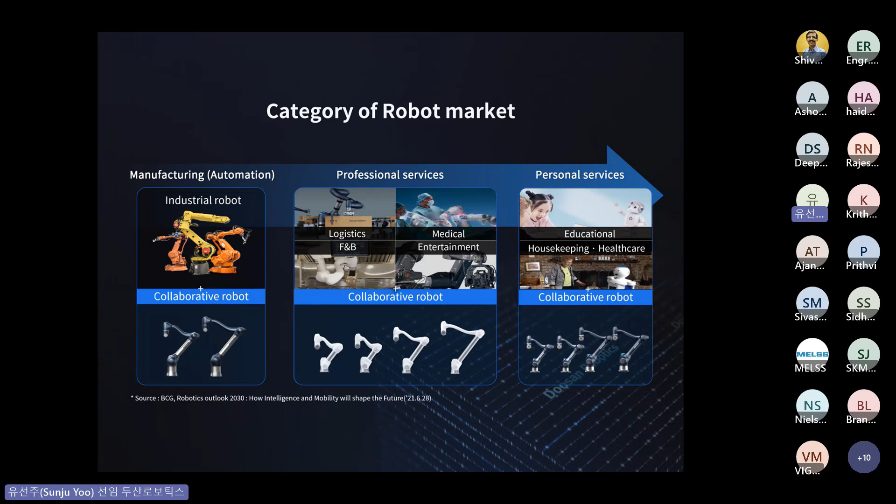Then, why should we use Cobots? First, industrial robots are large and heavy. Second, they are dangerous because of their high work speed, so we need to install a safety fence. On the other hand, collaborative robots are lightweight and can be combined with mobility like AGV or AMR. Second, it is safe, so we don't need to install a fence, and it is easy to program.

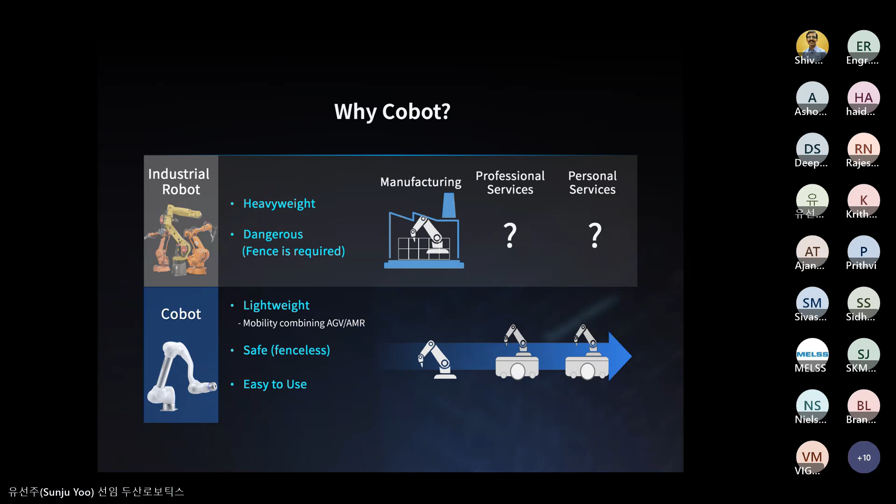Here are the three main features of Doosan Robot: technology, global presence, and new application leader. Different from industrial robots, a cobot has many sensors to collaborate with a human being. Therefore, Doosan robots specialize in being safe and easy, meaning that a non-professional can also operate easily by direct teaching and easy programming. Lastly, flexibility, since it's flexible with easy installation without layout changes.

Doosan Robot received the highest safety certificate, PL e, and safety category is level 4, which is at least one level higher than competitors.

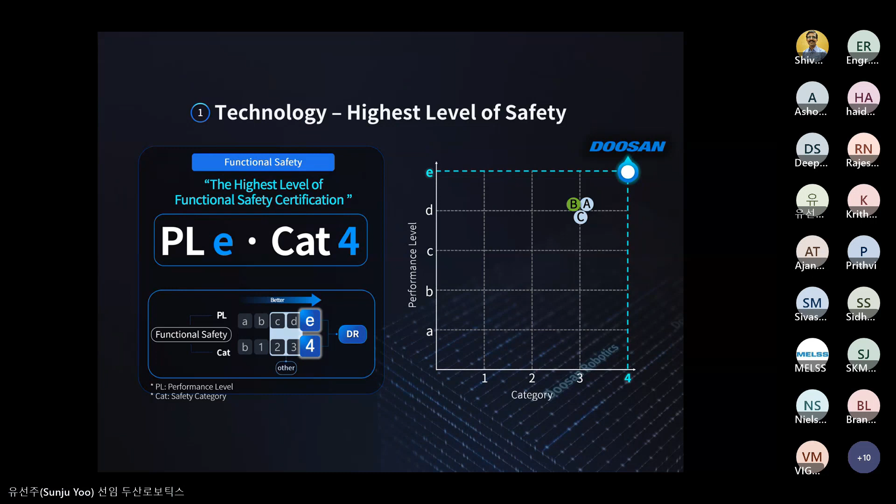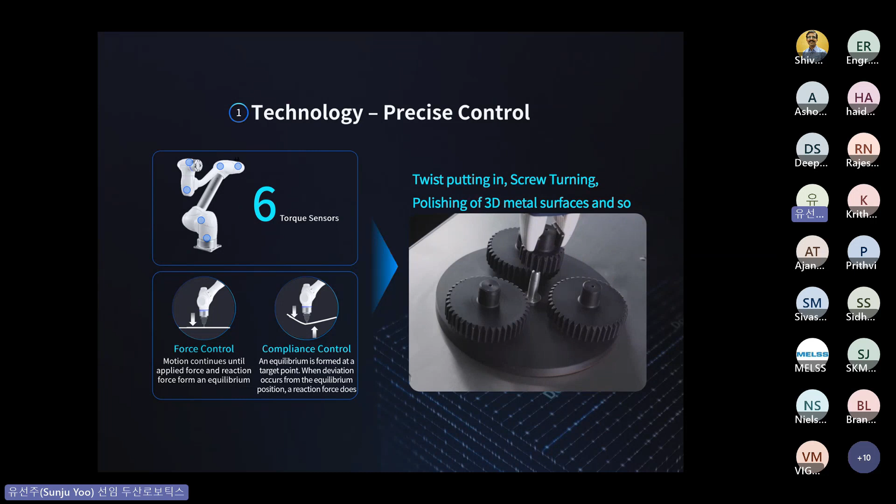Six joint torque sensors are mounted on the axis as a default. It is a really strong advantage over other competitors, which is connected to a high performance of force and compliance control. For example, this can be a big advantage in applications such as bolting, grinding, and polishing.

Since the free drive is also very smooth, the user can experience that during the teaching.

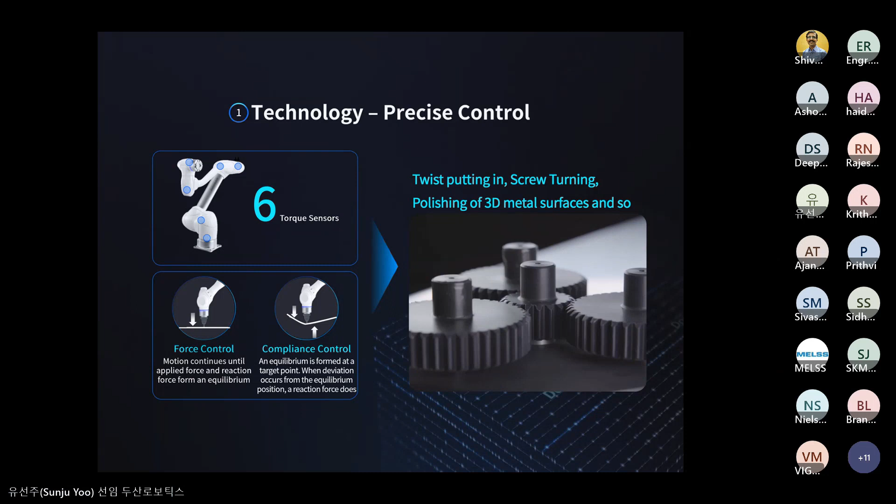And the specialty of each series: for the M series, not like the other Cobot brands, the joint torque sensor is mounted on all 6 axes, so we guarantee safe and precise force control. As an economical model, the A series can achieve short ROI and mount a force torque sensor at the 6th axis as an option. Furthermore, the H series, through the gravity compensation algorithm, is so powerful in the market, especially in the palletizing application, since it can handle the maximum 25 kg payload, which is the first and unique in the Cobot field.

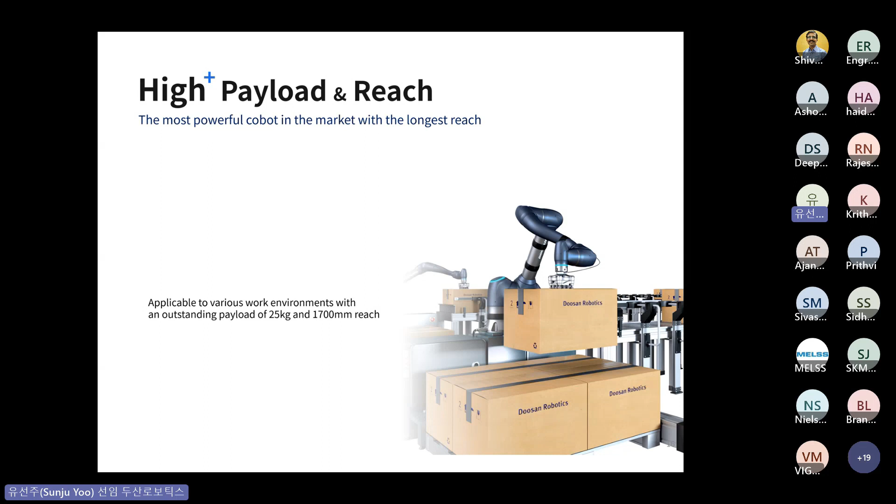Next, I will introduce our high payload robot H series and palletizing solution. H series is a high payload robot that can handle up to 25 kg with a maximum reach of 1.7 meters. It can be used in a variety of applications, including palletizing, heavy-duty handling, and machine tending. Six-joint torque sensors are mounted on all axes, and the robot itself weighs only 75 kg.

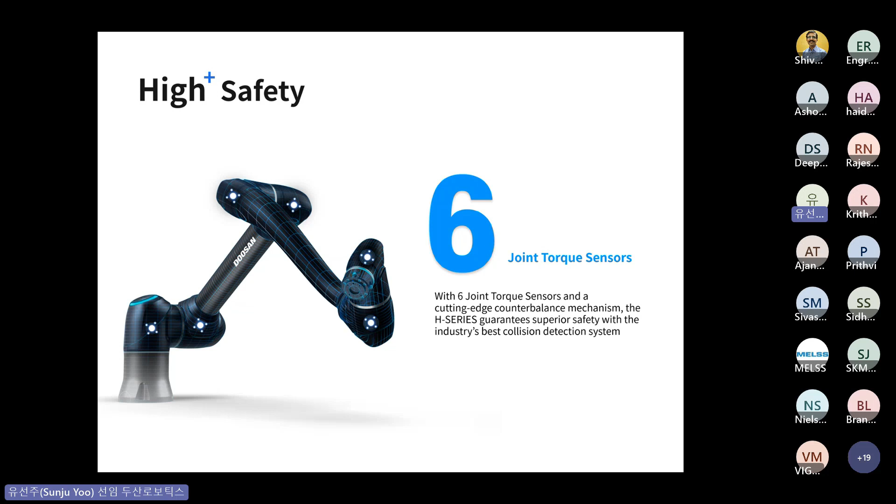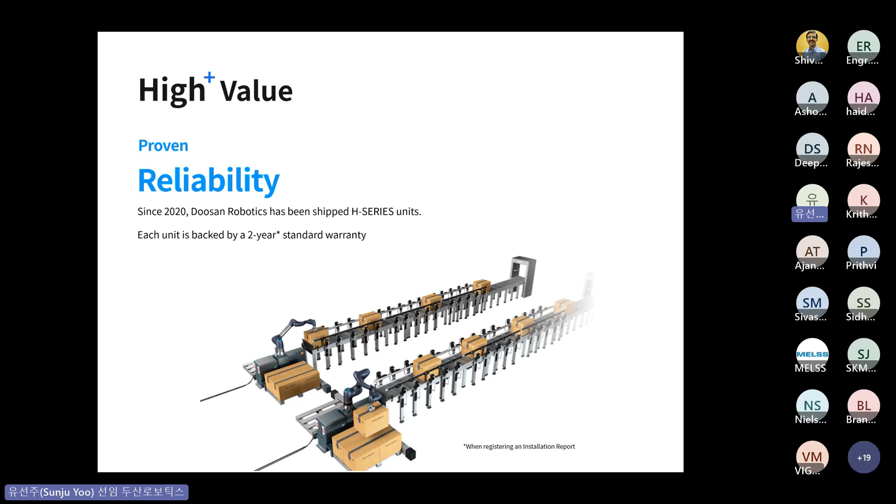So it can be installed in mobile robots such as AGV and AMR. We've already sold more than 600 units of the H series to the global market in the last 3 years. This period and data we've been selling high payload robots is enough to prove our product's reliability, which I believe is the most significant difference between the H series and competitors' new products that are just entering the market.

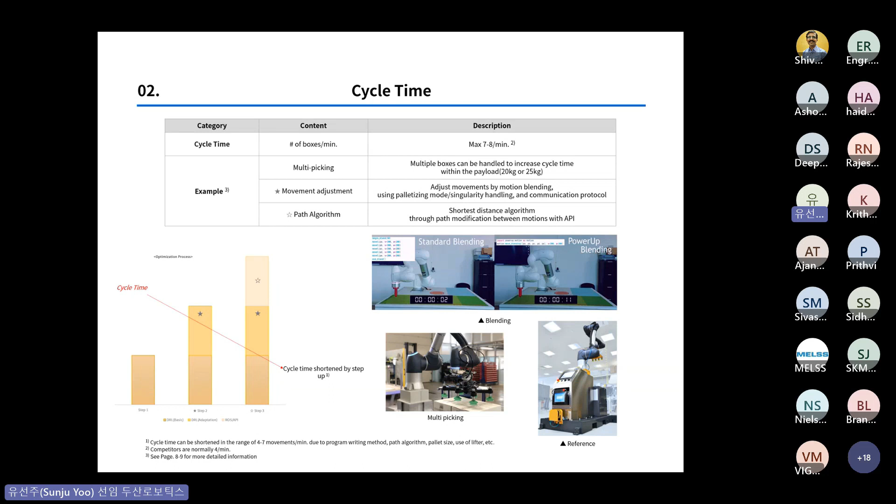Our robot can handle around 7 to 8 boxes per minute, which is a big difference compared to competitors who can handle around 4 boxes per minute. We can reduce cycle time with multi-picking to handle multiple boxes at once, and the blending function, which smooths out motion.

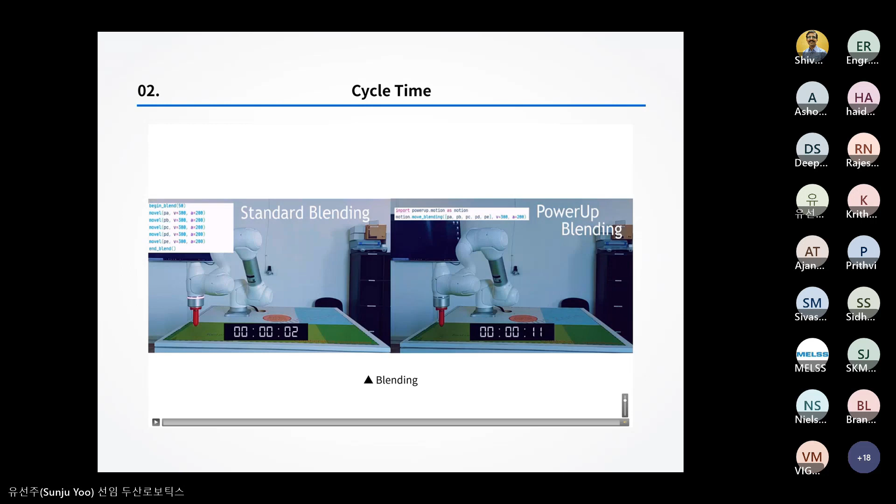Here is a video of the blending function. On the right side, the blending enhancement is applied, and the cycle time is further reduced by using palletizing specific motion functions, such as palletizing mode and singularity handling.

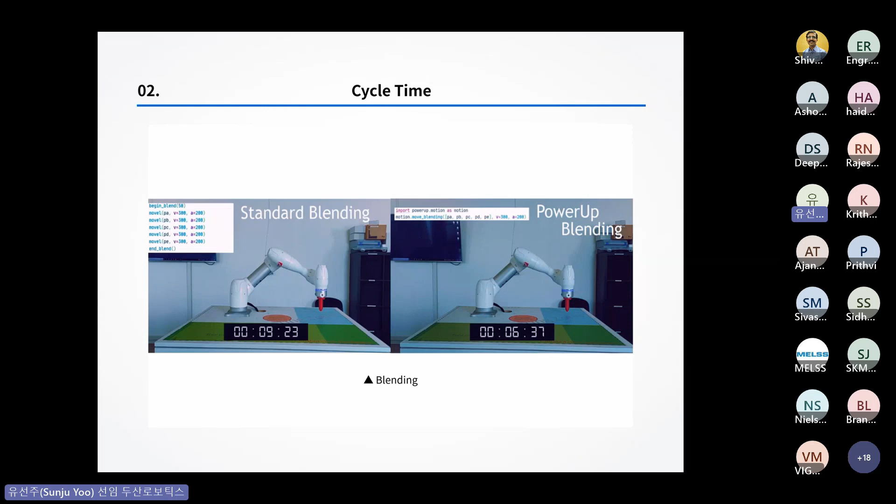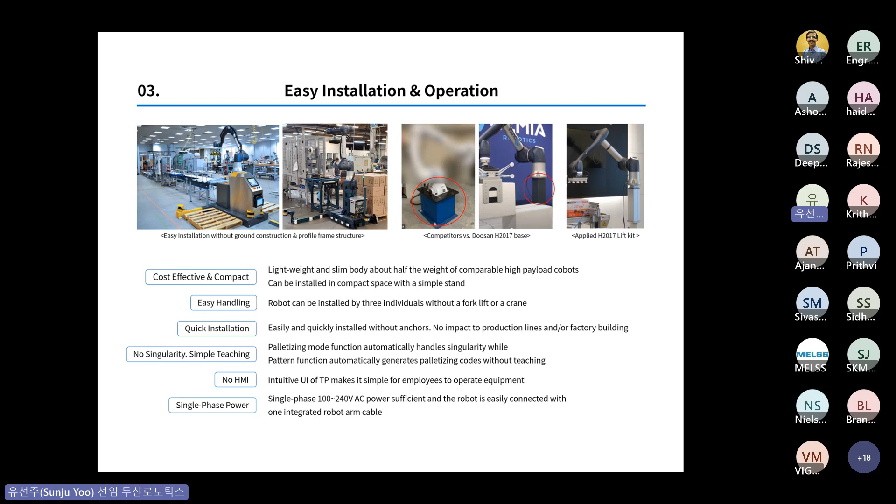And it's lightweight and slim, about half the weight of comparable high payload cobots, so it can be installed in a compact space with a simple stand. The robot can be installed by 3 individuals without a forklift or crane, easily and quickly installed without anchors, with no impact to the production line and factory building. The palletizing mode function automatically handles singularity, and the pattern function automatically generates palletizing code without teaching.

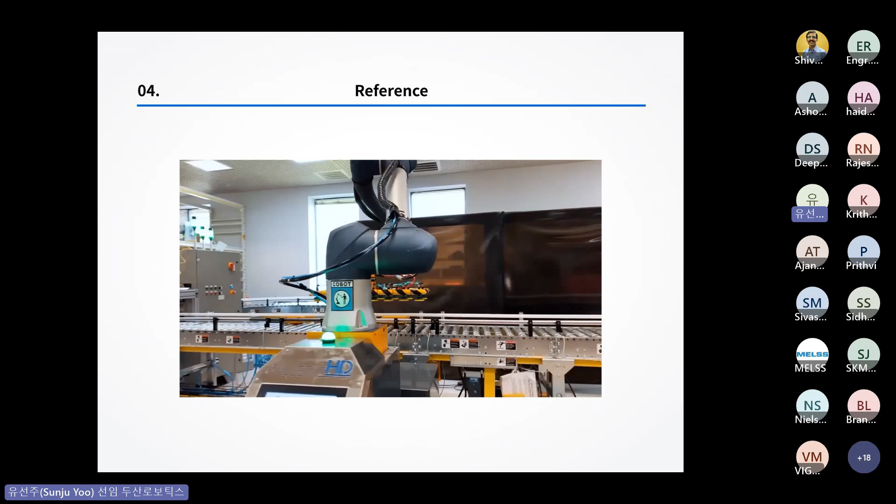I was going to show you some reference videos, but there's some problem and it's not playing. But you can find them on our YouTube and LinkedIn if you want. If you have any questions, please ask us at the end of the MELSS presentation. Thank you for listening.

Okay, are you seeing my presentation? Yes, we are seeing the presentation. Yes, it's good. Okay, all right. So first of all, thank you everyone for joining today's webinar and giving us the opportunity to talk a little bit about D:PLOY and how that works with palletizing.

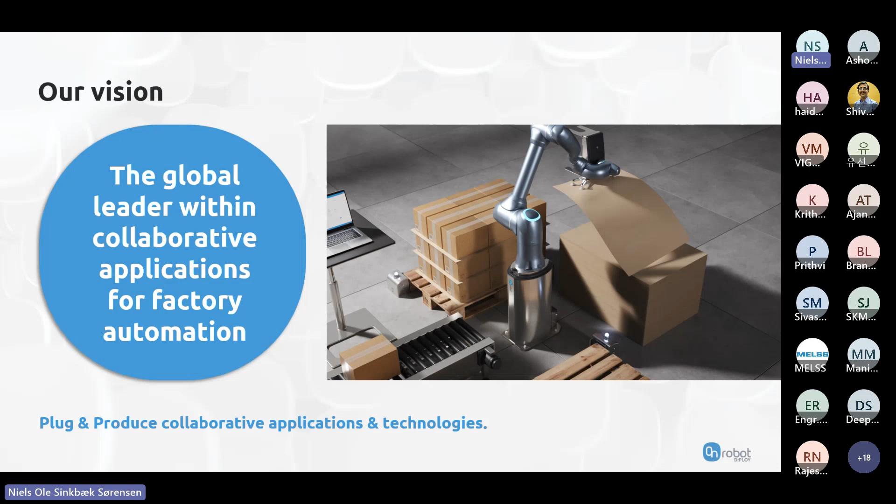So first of all, you might know OnRobot, you might not know OnRobot, but basically OnRobot is a company that over the years has become the largest manufacturer of collaborative end effectors globally. So the vision of the company is basically to become a global leader within collaborative applications, not just collaborative tools, but collaborative applications for factory automation. Everything we do is basically plug and produce, and we produce collaborative applications and technologies.

The company is from Denmark. We are based out of a city called Odense in Denmark. You might have heard of it, it's kind of like the Silicon Valley of robotics in Denmark, and there are a lot of robotics companies based out of there. Personally, I am based out of Singapore, which is the regional APAC office, but we also have offices in China, Korea, and Japan for the APAC region.

In terms of sales, we are exclusively selling through what we call partners, and partners can be distributors and or integrators. MELSS is one of our partners in India, but basically we have more than 700 partners around the world selling OnRobot equipment.

Here's a very brief overview of our product portfolio. I'm not going to go into too much detail about this because I'd rather focus on palletizing. But we have a lot of different kinds of grippers, force torque sensors, vision systems, some processing tools, and manual tool changers.

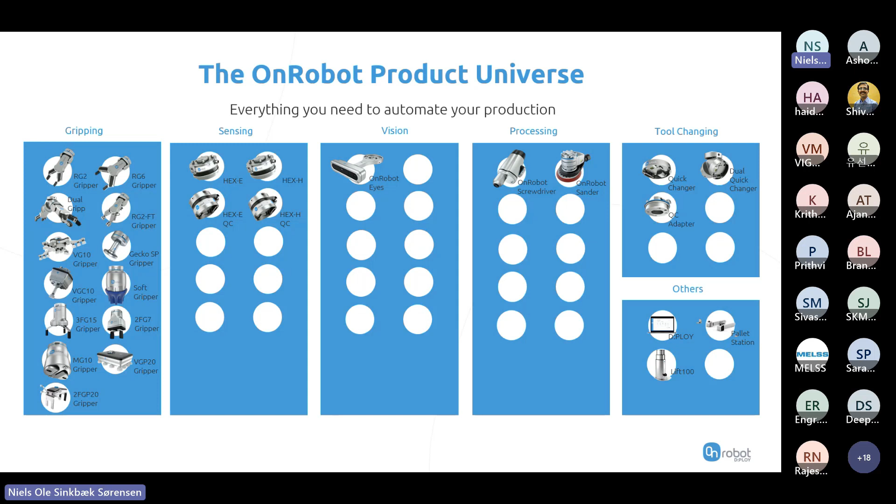We have our 7th axis lift and pallet stations, which are obviously used for palletizing. And then we have D:PLOY, which is our latest platform, launched a few months ago, and which is what I'm going to focus on mainly today.

So if you look at the present versus the future: what we used to do was basically just sell hardware. Now, the future, which is actually the present, is we are trying to sell a solution rather than bits and pieces of hardware. So obviously we don't sell robots, so we work with other companies to build a solution, but the majority of what you can do for a palletizing solution will actually come from OnRobot.

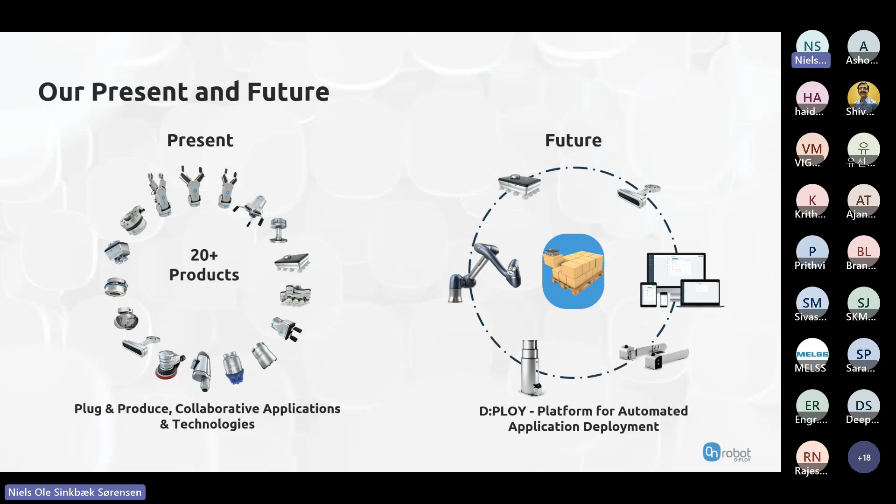We have the Cobot from Doosan. Then you might need other things like conveyor belts and so on, which has nothing to do with us, but this is something MELSS can help with as well. We are basically selling solutions now, not individual products.

If you look a little bit into the robotics industry, initially we only had industrial robots, which came mainly in the automotive sector. Industrial robots are basically very fast, very dangerous, very strong. So they need to be fenced off and you cannot work side by side with humans. That's where Cobots came into the picture about 15 years ago.

Doosan is one of these leading Cobot brands. The Cobot basically made it a lot easier to do applications with robots, and also safer, being able to have applications where humans and robots work hand in hand.

And then after that came solutions like what OnRobot have. We call our solution one system, zero complexity, where you can basically take any of our products and put it on any robot brand and any robot model and integrate it in the same way.

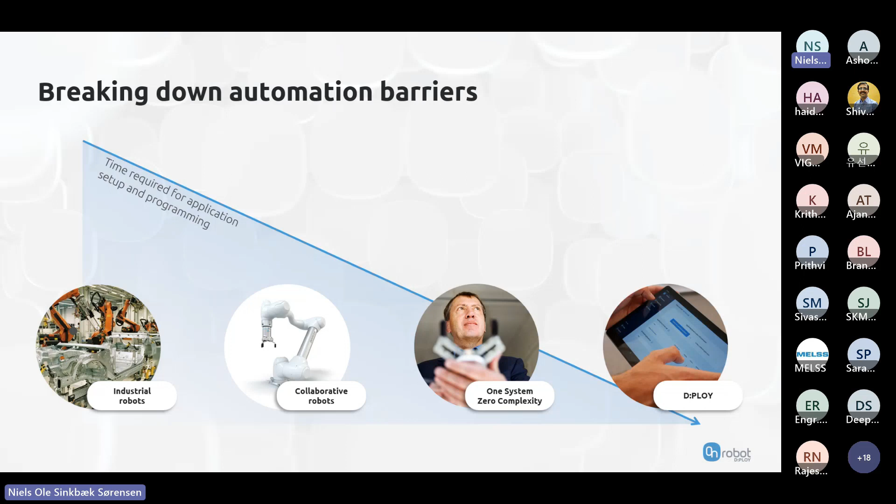But reality is, even with Cobots, of course they are easier to program than industrial robots, but there's still a lot of programming needed when you do applications. So this is why we came out with D:PLOY, which I'm going to talk about now.

You might see in the market a lot of companies using terms like easy programming, fast setup, simple, painless program, easy plug and play, etc. But the reality is that almost all these softwares and applications still require you to program it. You still need to know how to set up an application and be an expert to use it. So is it really that simple?

If you just want to do a simple pick and place, move it from A to B, of course it's not particularly complex. But if you go into things like CNC machine tending or palletizing, things tend to become very complex and time consuming. You can easily spend a week or two just programming and optimizing the path planning for one pallet, especially on industrial robots.

So whether you're an end user or a system integrator, you typically still need expert engineers. You need to spend a lot of hours programming the robot, the grippers, maybe the lift, and other parts and pieces that might be part of the application you're working on.

Your people have to be trained on how to program a specific robot brand. If you're an end user or system integrator working with multiple robot brands, you need to be able to program multiple types of robots, which adds on to the complexity and time used.

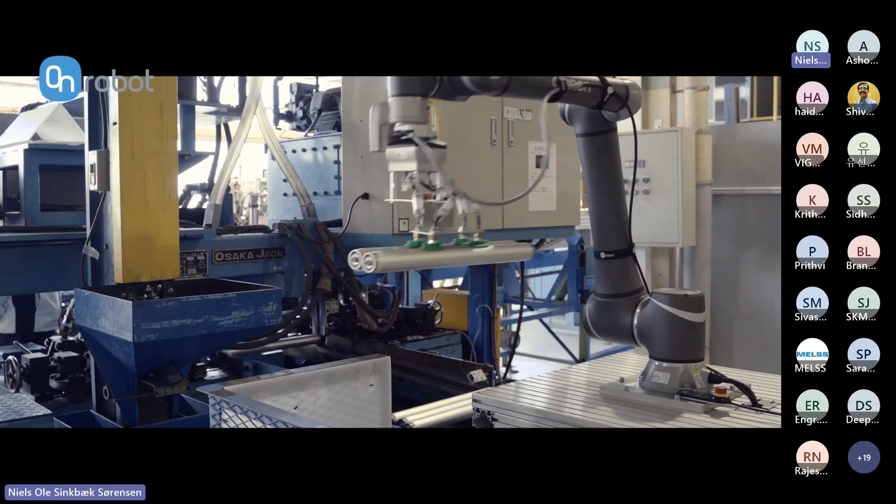The field of automation has grown exponentially over the last decades. Today, automation helps businesses deal with labor shortages, optimize productivity and quality, increase profitability, and much more. Although many companies have embraced automation, key barriers to implementing it remain, especially for SMEs. This is all about to change. For the first time in the history of industrial automation, you are able to automate the development of your robotic application. Let me introduce you to Deploy. With Deploy, you can build, run, monitor, and redeploy your robotic application, at a fraction of the time required so far. With Deploy, you are saving at least 90% of the time compared to using current technologies.

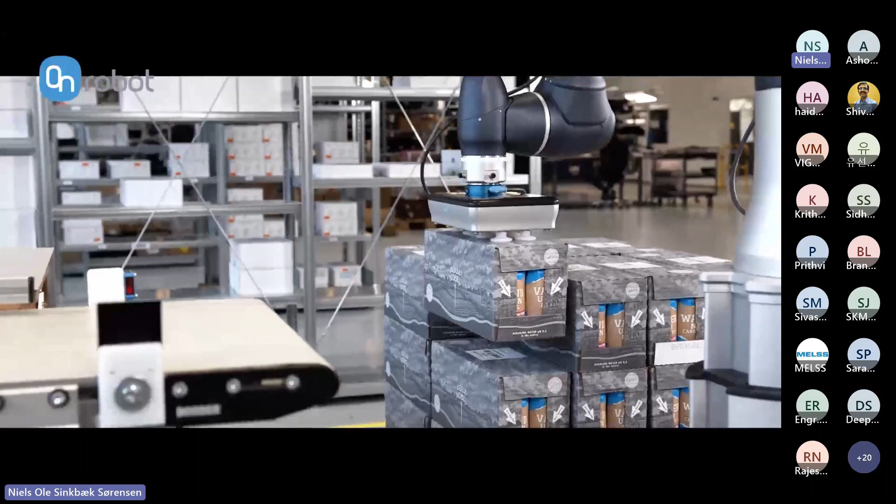In the 1980s, operating a computer required quite a skill set. However, thanks to innovation and smart user interfaces, the use of a computer has been democratized for everybody to use. Imagine if the same revolution were to happen to automation - that's exactly what Deploy will mean to the automation industry. With Deploy being online, on-site, you can develop your robotic application exactly where you need it, without any programming. Deploy will step in and take over most of the manual tasks related to your application development, meaning the entire application can be built 10 times faster than today. Deploy has been OnRobot's goal from the beginning, and we've been laying the groundwork for this for years through our one system, zero complexity philosophy.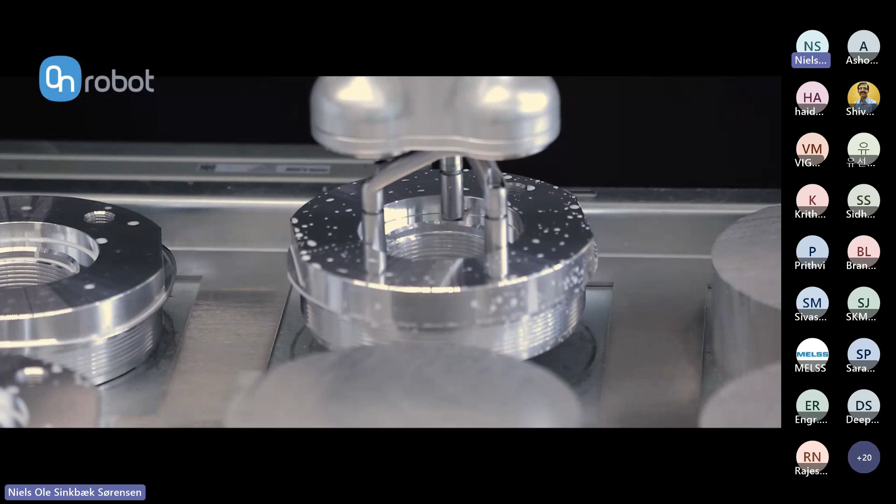With Deploy, manufacturers, system integrators, distributors, and robot manufacturers alike stand to benefit from the drastically reduced time and complexity of application deployment. Every industry has its revolutions now and then - this is one of them. Change. Innovate. Evolve.

Okay, I hope that was running okay. So what is Deploy? Deploy is basically a cloud-based platform for you to build, deploy, and monitor various kinds of collaborative applications. One of these applications is palletizing.

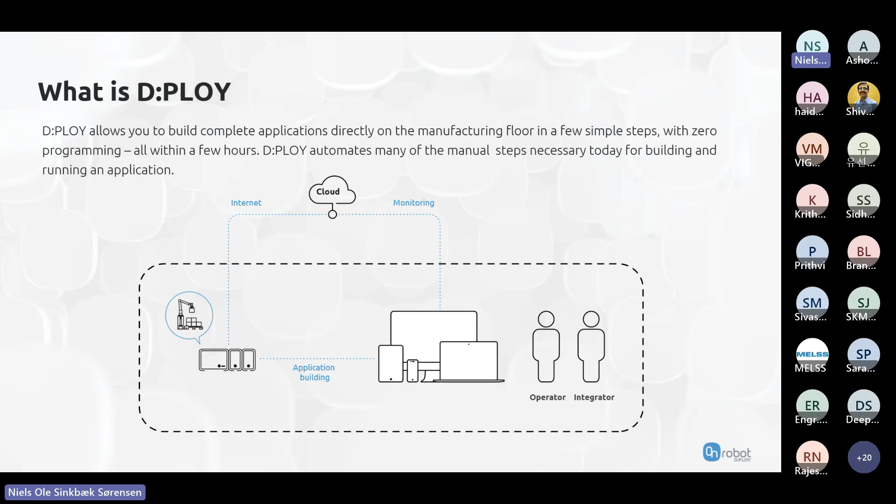Basically, you have a piece of hardware which is connected to the robot, the end effector, the conveyor, the CNC machine, whatever equipment you're working with. And as long as you have an internet connection, that's basically what you need. So you can do a full application using a mobile phone, a laptop, a PC, whatever you have access to. You just need a browser and an internet connection, and you can build a full application very, very fast.

So there's three pieces of hardware. We have the OR base, which is kind of the brain of Deploy - everything is connected to the OR base, and that runs the application itself. We have the OR machine, which provides connectivity to various kinds of machines that support analog signals, and also provides additional IOs if you need that. And we have the ORCOM.

Just to understand how D:PLOY works - because it is cloud-based, that means to set up the application, or to redeploy and change the application, or to monitor the application, you do need internet access. So if there's no internet connection in your factory, you can use the ORCOM and connect via 4G instead to set up the application. You do not need internet to run Deploy unless you want to do monitoring, because the monitoring is in real time, so you would need internet for that. But otherwise, you do not need internet to run the application - it's just for setting up, or if you change anything within the specific application you're running.

So it is fairly easy. Basically, there's 5 steps to set up Deploy. The first is cell setup. So again, if you have your mobile phone or tablet, you connect to the OR base, connect to a browser, and get into the application for Deploy.

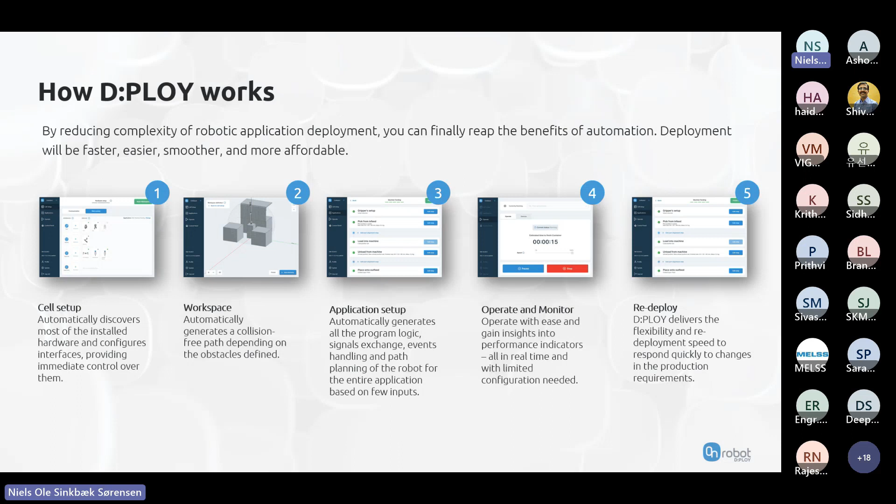And then finally, this is really where Deploy makes a lot of sense. There's a lot of applications out there, and palletizing is definitely one of them, where there's a lot of redeployment because companies change box sizes—working with a certain product one day and another product the next. So the box sizes change, and you have to redeploy how your pallet looks, how it's set up, the path planning, and so on. That you can now do in maybe 30 minutes or even faster. So rather than spending hours or days on this, you can do it in an hour or even less.

Here's a quick example comparing a traditional setup for a palletizing application with conventional programming versus doing it with Deploy. Here we're mentioning 40 hours for a conventional setup—you can always discuss whether it's 40, 30, or 50 hours; this is just an average time we're aware of from our partners doing palletizing. So basically, instead of spending 40 hours with conventional programming, traditional setup, optimization, collision avoidance and so on, you can do it in 4 hours with Deploy.

So basically, you're saving 90% of the time, equivalent to 36 engineering hours. And even though engineering hours might not be as expensive in India as in Singapore or Denmark, for instance, that's still a lot of time and money saved. And this is just the first deployment—every time you redeploy, you're saving a lot of time again. And we all know, especially with redeployment, engineering hours are one thing, but downtime is the most expensive thing in a production. So the less time you're not running, the more time you're saving.

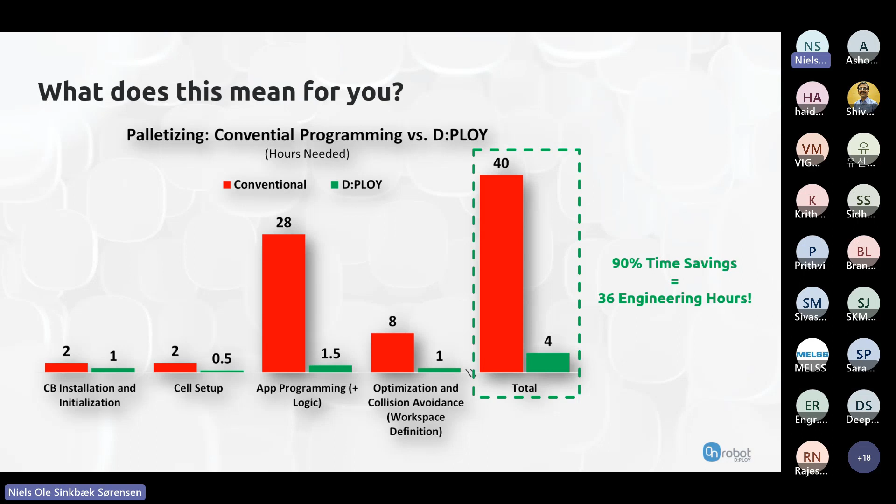Next, I'm just going to show a short video of one of our palletizing applications. This one is running in New Zealand, using a Doosan Cobot with an OnRobot VGP20 gripper. I have to say this is not Deploy, because it's from before Deploy was launched, but nonetheless you can still see a typical example of palletizing with Doosan and OnRobot.

So you have to look at Deploy a little bit like—I always try to explain it like Windows. When the first Windows software came out, it had very limited functionality, and over the years, every few months, an upgrade came out that could do more and more. Deploy will be a little bit similar.

Deploy 1.0, the current version we launched a few months ago, caters to 4 different applications: one is palletizing, one is packaging, one is transferring—which is basically pick and place—and one is CNC machine tending. And when it comes to integration with Doosan, you can see here on the right side the different Doosan models that work with Deploy, which is almost all of them, if not all of them. So it's very easy to integrate with Doosan as well.

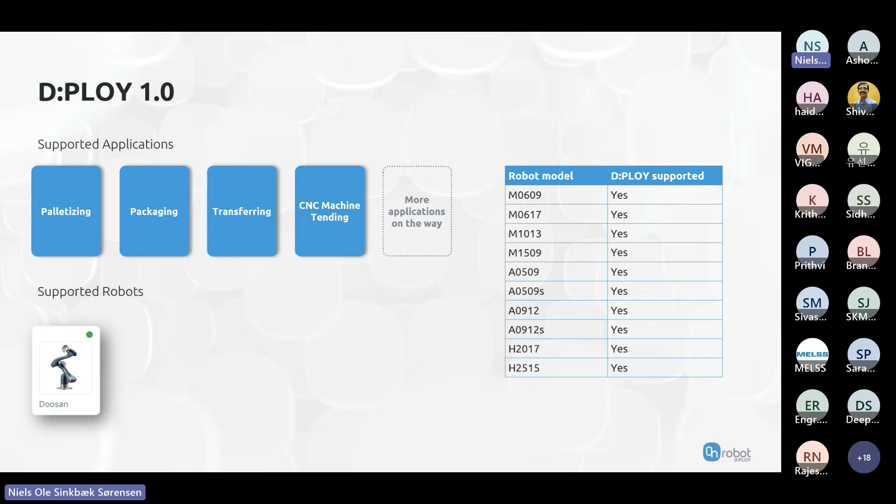Over time, Deploy will develop. So we have 1.1 coming, 2.0 coming. There's more applications that will be integrated with Deploy. Some of them are IMM, press brake, depalletizing, sanding, screw driving, and so on and so forth.

Now, one thing that's important to mention is that once you get the Deploy platform, you actually have access to everything that Deploy offers. When the Cobot came out, one of the great selling points was that it's very easy to move from one application to another. It doesn't take much time, it's very flexible, and of course that's partly true compared to industrial robots particularly.

But the reality is that hardly any clients are doing this, even with Cobots, because it's still complex. For example, if you want to move from palletizing today to machine tending next week, it will still take a lot of setup, one or two weeks, of setting up and optimizing everything. So it's really not that flexible in that sense. But with Deploy, you can basically do it within a day. You can move from palletizing to CNC one day, CNC to packaging the next day, and do it very fast, optimizing everything and minimizing your downtime. So talking about Cobots being flexible and able to move from application to application, this is really true now with Deploy.

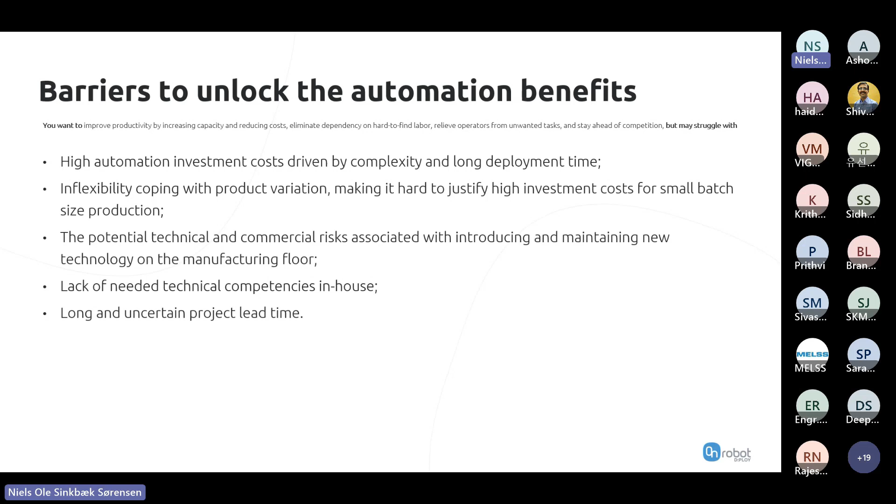With Deploy, you can basically take control of your own automation journey. You might have an SI implement the first solution, but certainly for redeployment, you can easily learn how to do it yourself. The Deploy platform is very easy to learn, so you basically take control of that. You're able to monitor certain data, like how many picks and places there are, cycle time. You can get warnings if the application stops running, and so on. So if you want a monitoring tool, that's automatically included.

You can obviously automate much faster, up to 90% faster, and the same goes for redeployment. You're less dependent on staff that you train, because even if they leave, it's very easy to retrain staff how to use Deploy, and that goes for both an SI and an end user. Therefore, you can also reduce your training hours a lot. So not only is there less cost and less risk, but you also have time to do more projects.

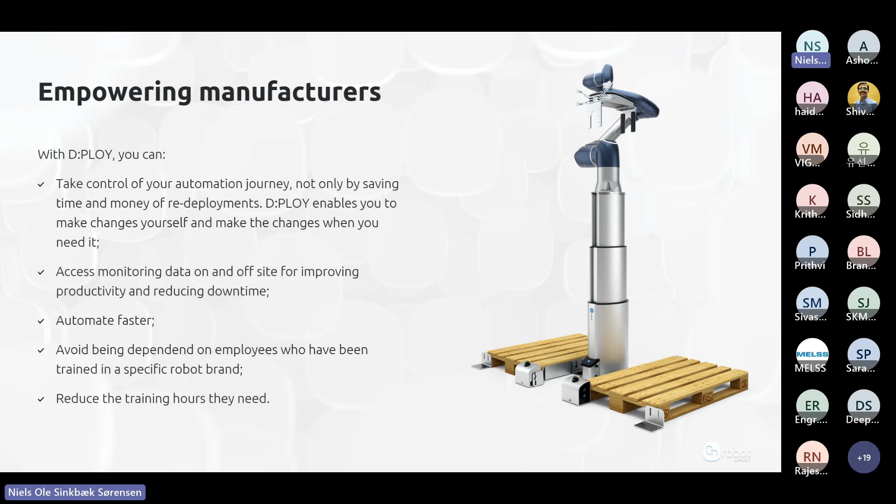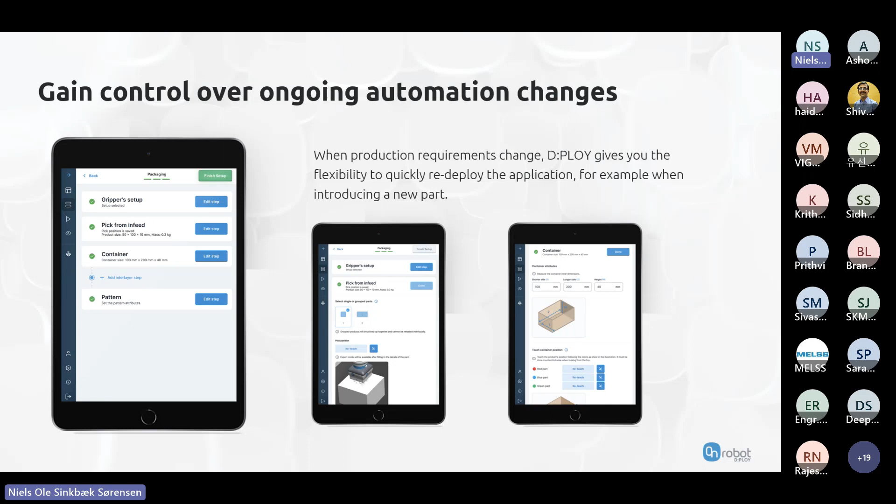So this is kind of how the application will look on your phone or your tablet. Very, very easy - a few simple steps that you have to go through to set up and be able to run the application.

So what D:PLOY does, basically, is it breaks down those automation barriers that a lot of end users still have, because they're worried about what happens if what they're buying doesn't work properly, or who is going to handle it, or is it flexible enough. It dramatically saves deployment time, and more importantly, redeployment time, because that's really where you can save time and money. That comes at a lower cost and a more attractive ROI, which is always important.

It has the normal benefits like any automation process does - solving labor shortages, improving productivity so you can become more competitive. It will relieve operators and workers. If you look at palletizing as an application where you have manual staff packing pallets every day, some of them are lifting 1 to 2 tons of boxes in a single day. It is extremely harmful for the body, and it's really bad. It is something that should not be done by manual labor. It is just not right.

And of course, you can fully take control of your automation journey, and you can make your own modifications. You don't really need a system integrator if you want to make simple redeployments. And of course, you minimize your downtime as well.

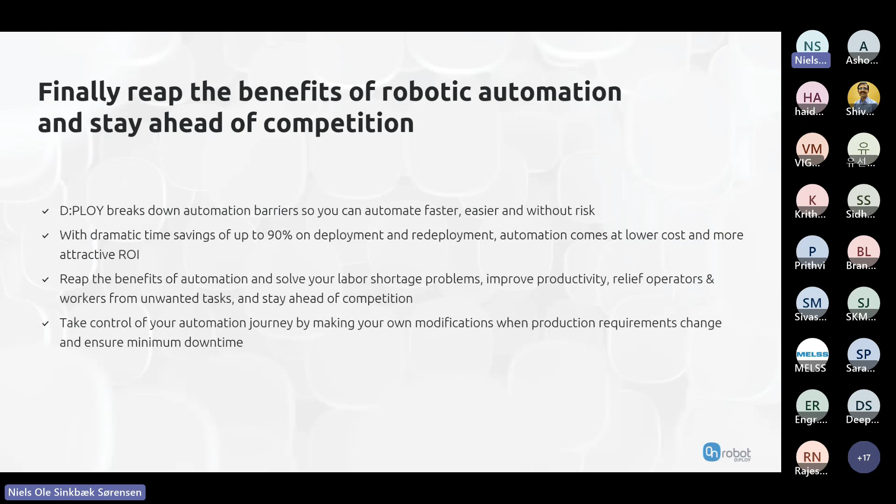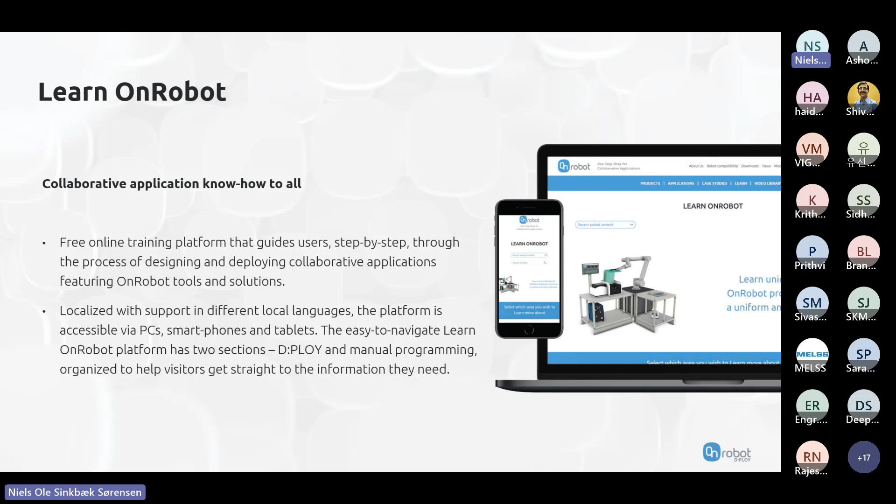I'm almost done with my presentation. I just want to say, if you want to know and understand a little bit more about D:PLOY or OnRobot, you can go to our website, www.onrobot.com. Part of the website there's a link called Learn OnRobot. It's a free training platform with short videos that tell you step-by-step how to do a certain application with a certain robot and end effector, and also how you can do that with D:PLOY. It's very easy to go through - you can just sit and watch some videos and get a lot more information and understanding of how D:PLOY works. So that's it for my presentation. Thank you very much.

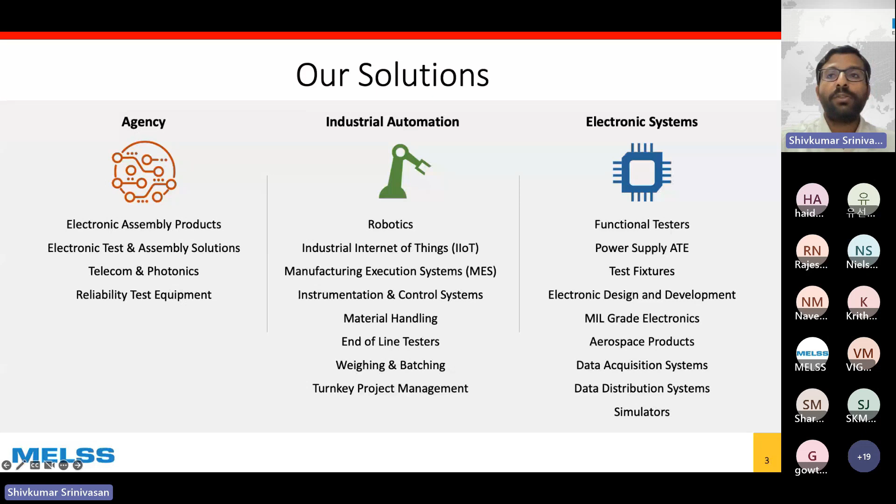So we broadly operate in 3 business verticals, 2 of them focusing on electronics and electronic related solutions, and of course data acquisition simulators. Our area of focus for today's meeting would probably be more on the industrial automation that we provide as a turnkey system integrator, being able to work all the way from robotics to electromechanical solutions and the IT/OT solutions required to connect your systems. This is our head office in Perungudi in Chennai, and we are an ISO certified company, both for quality management and information security management systems.

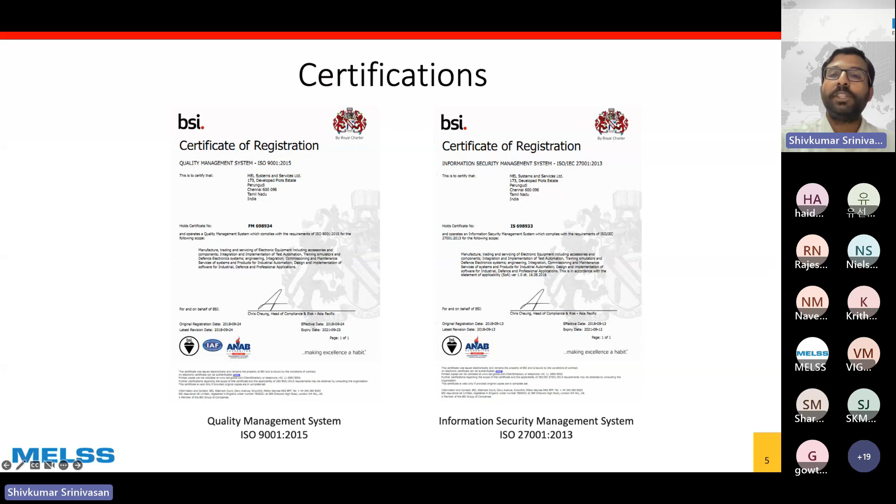So talking about industrial automation, MELSS as a solution provider and integrator provides turnkey automation solutions that include designing and delivering the complete line for a customer. From when the problem statement is given to us, we go into the details of what output needs to be generated off the line - how many parts per minute, how many bags need to be palletized, how many boxes need to be maintained, or for a machine tending application, what is the cycle time and what accessories are required to manage it. It could involve jigs, tools, fixtures, conveyors, or integration with other machines, like CNC machines, a bagging machine, or a packing machine.

So MELSS is able to integrate all this together, including the mechanical parts. This could be with conveying systems, motors and servo-based applications, and of course on the electrical side as well. We also have a strong presence in software systems, where we provide manufacturing execution solutions, integration to your production planning control system, and also solutions for mistake proofing or poka-yoke, including complete traceability right from your raw materials to your finished goods. And we provide OEE and real-time dashboards.

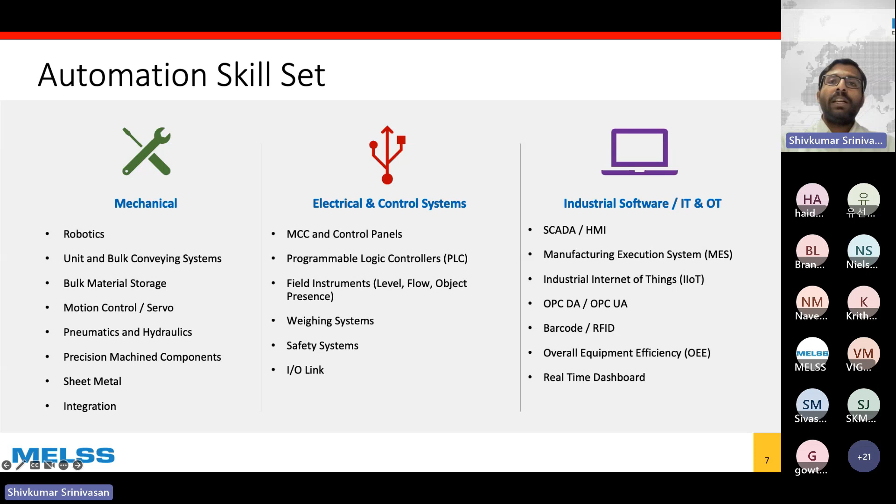So MELSS, we are adept at providing solutions for assembly lines. This could be conveyors or indexing tables, and of course servo-based XYZ gantry systems, and a lot of applications these days where we utilize robots along the lines. So it's just not always jigs and fixtures. We work very actively with Doosan, being their partner in India, to provide solutions where the manual intervention can be avoided, and then we put them across the lines.

And as part of this, it is just not on an assembly or manufacturing side. Towards the inspection, again, we have a Doosan Cobot where we are able to do inspection applications, and then of course on the packing and palletizing, where the focus of the solution today is. And as part of this, there is also integration that we will be requiring to do.

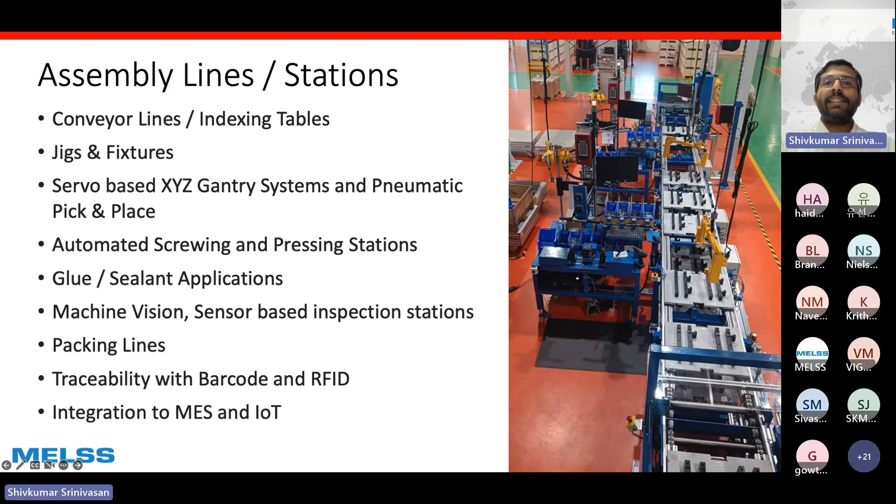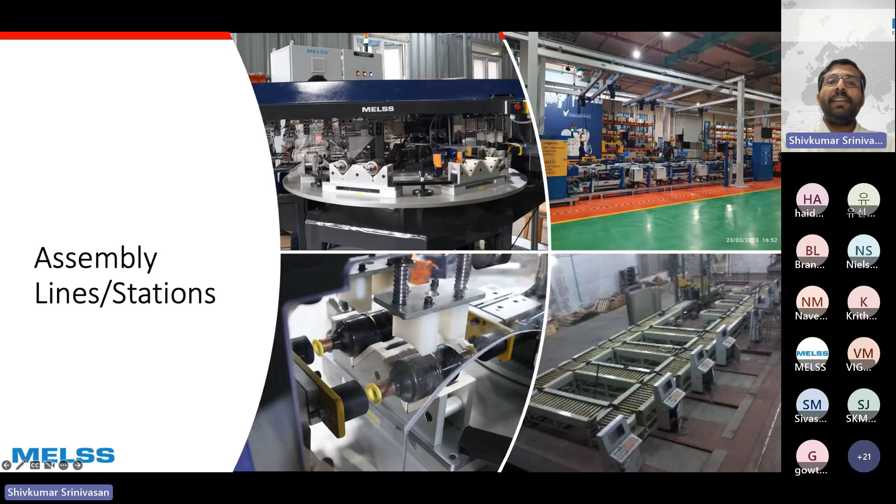So our assembly lines and stations, as we see it, need not always be only a conveyor-based solution. We could have a station where we are putting objects, and then these objects need to be worked upon. Let us say screw driving applications, torque driving applications that have to be done, press fits, or doing some sensing or vision-based inspection solutions. We are able to do that.

Let me just run a quick 2-minute video to demonstrate our capabilities and the type of projects that we have done.

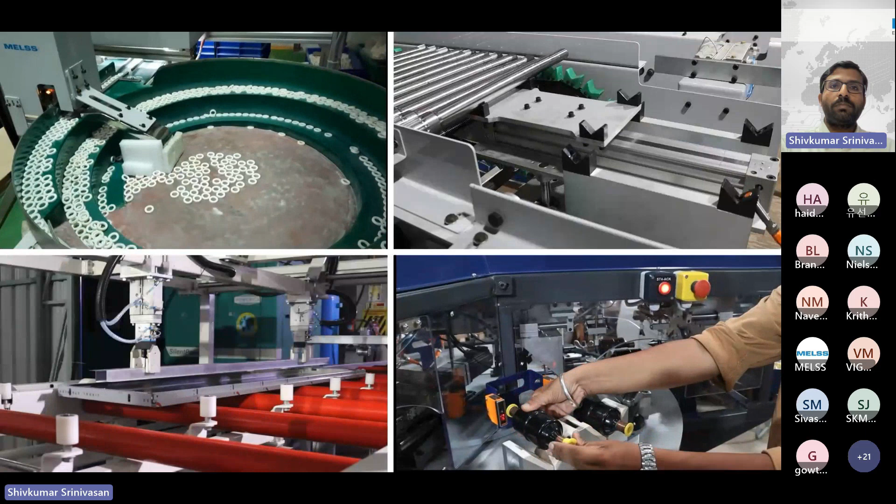Coming to robotic solutions, we work on a wide variety of solutions. These could be machine tending applications, pick and place solutions, sealing and gluing applications, and sealant dispensing applications that we see quite often these days. Inspection, which could be camera vision based, or using different types of sensors or instrumentation for pressure checking, torque checking, or gauging applications. So we engage on that.

Packing and palletizing - this could be cartons, bags, or even assembly inside. And this is where it is quite interesting that the collaborations we have with both Doosan and OnRobot help us quickly deploy such applications using the different types of end of arm tools that we have and a wide variety of cobots available, with different payloads and reach from Doosan.

Now, the advantage also, like Niels was explaining earlier, is that the OnRobot D:PLOY has multiple functions. While we are focusing on the palletizing solution today, we've got solutioning for different types of grippers. So the standard functions available on D:PLOY for machine tending, CNC machine tending, or pick and place as well. These are solutions that we will be able to provide to customers.

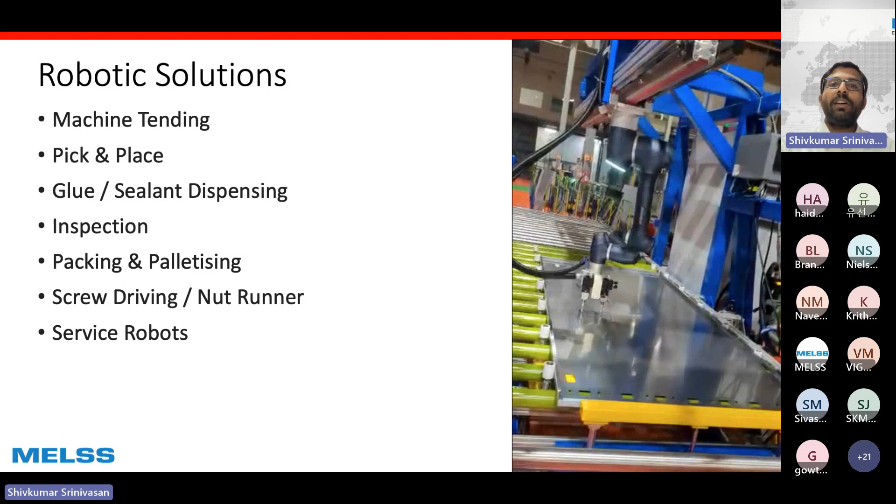And of course, screw driving and nut runner applications, including force sensing, because we will need to make sure that the cobot is able to handle this and we are able to provide that. And service robot applications - some of these are the case study videos that Sunju had also shown during her presentation. This could be for floor tending applications, a restaurant type of solutioning, or at an airport, these kinds of applications.

Okay, again, some photographs of the type of solutions. MELSS, while we work on cobots with Doosan, we also have the capability of working on traditional SCARA or industrial robots for more heavy duty applications, or where the payload is much more, or a longer reach. So we are able to do that. And in those cases, we take care of the complete safety fencing and any other safety that needs to be handled as part of the industrial robot implementation.

We've also deployed several palletizing applications in the past. These could be for bag palletizing or box palletizing. In this case, MELSS as an integrator, we are able to provide the complete conveyors as well as the pallet dispensers, routing of these pallets across. There may be cases where we don't want forklifts or other material handling equipment to move as part of the line. Rather, we will want to be able to quickly move these pallets as they go.

In a typical bagging application, you may have continuous bags that keep coming out and you cannot afford time to change pallets. In these cases also, we are able to create complete conveyor networks to be able to move these pallets out and bring fresh empty pallets in.

Again, when Niels was talking about palletizing, one common application is dispensing slip sheets. The VGP20 gripper also has a mode to pick up slip sheets and place them in between the layers. So this is something we could do, and we have the expertise in handling different types of functions here.

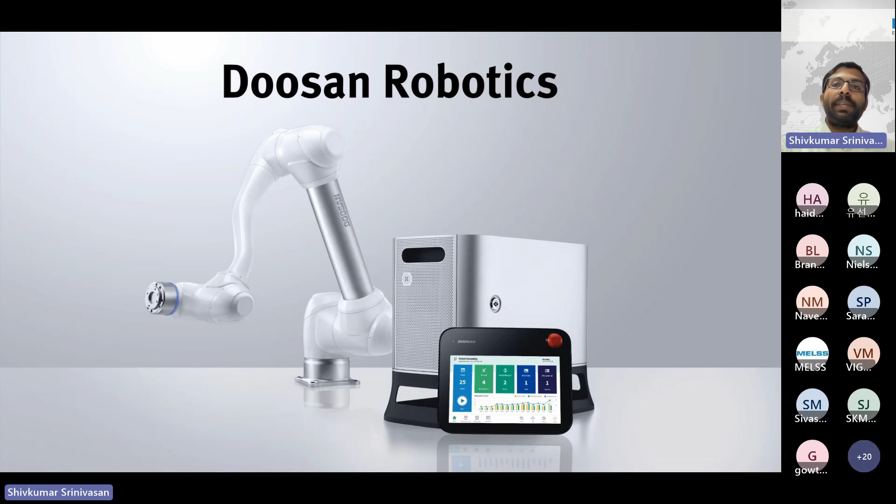Niels did present about OnRobot while the focus was on palletizing. You can see there are a wide variety of other grippers and end of arm tools available with OnRobot. These could be very useful for different applications, including machine tending, or soft grippers which are helpful to pick and place objects of irregular shape and size, typically food applications. There are also electric screwdrivers and sanding applications for polishing.

What's very interesting about all OnRobot products is that you don't need an external air supply, which makes it easy to deploy these solutions even on a moving platform. Even if there is a vacuum-based pickup, the air is generated internally, so you don't need an external compressor to run the solution.

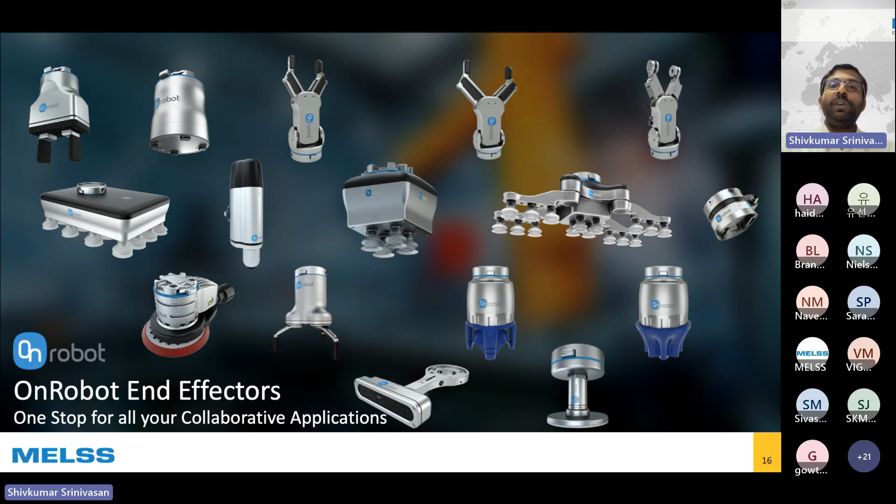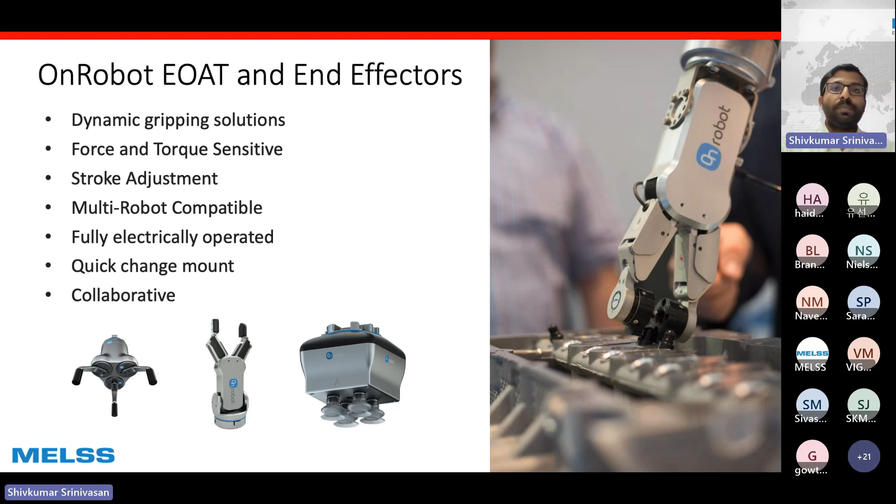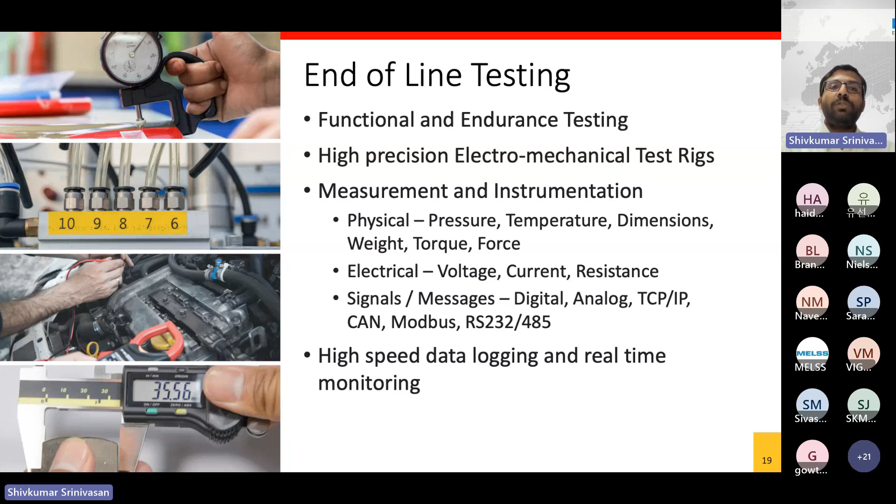Now, talking about end-of-line testing, MELSS also specializes in specialized end-of-line testing applications. These could be functional or endurance testing solutions, working with high precision electromechanical test rigs. We custom design solutions for this end-of-line testing, and in more recent days, a lot of these solutions are being used with robotics.

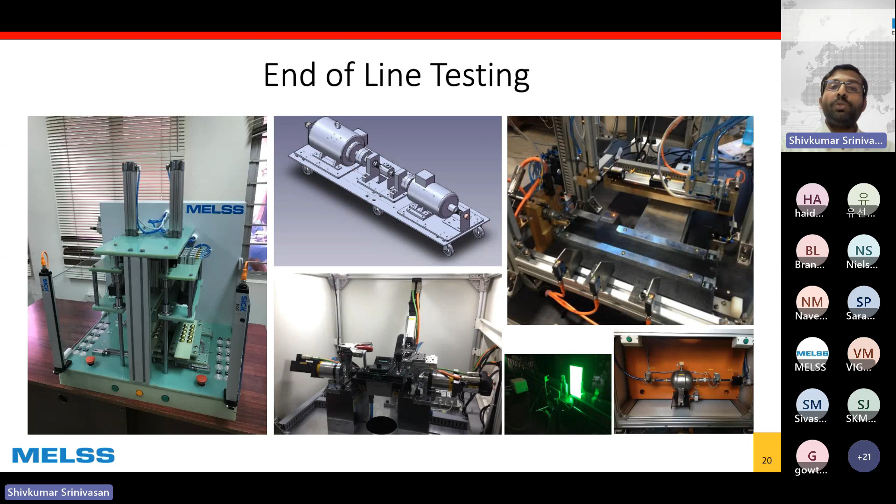So if you need to do sampling, or every part needs to be tested, we could design the testing solution, and the robot can be used to deploy such a function without any manual intervention.

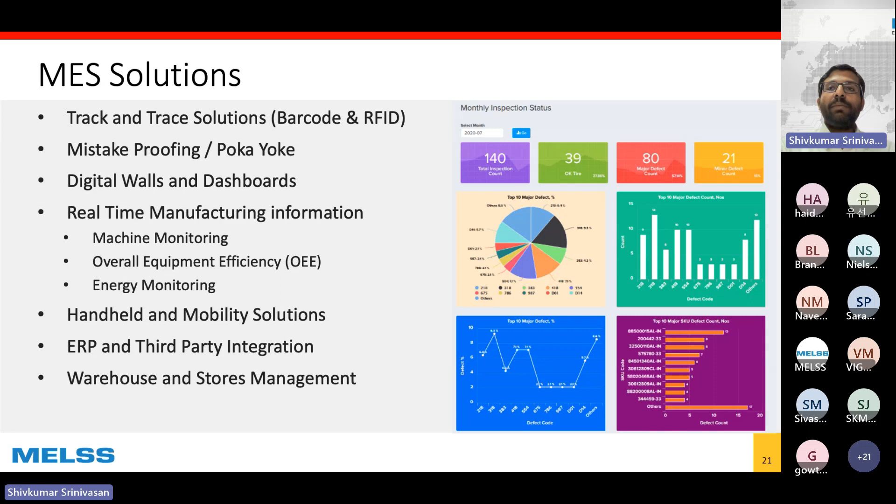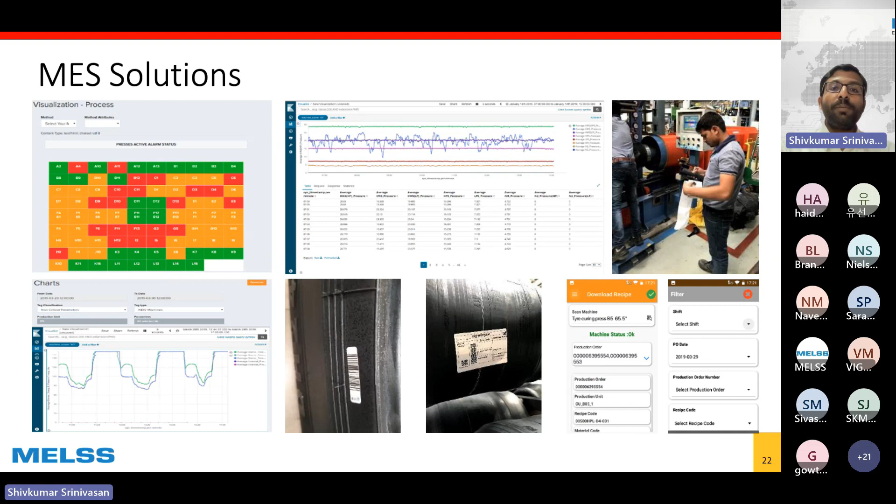And we have a complete Industry 4.0 group that can deliver all types of MES tracking, traceability solutions along with mistake proofing and digital walls. We've deployed several of these with many customers, including real-time data acquisition from your machines and PLCs. We combine them with real-time data available on the shop floor, and we do end-to-end traceability.

We also have our own product group handling IIoT solutions, where even when you deploy a robotic solution, you'd like to get real-time analytics out of that. Of course, these days the Cobot as well as the OnRobot software package gives us a lot of these interfaces, and we can pick up this information.

But for legacy machines, we could go with IIoT solutions, and MELSS has some standard products for edge gateways and touch panel displays from which we can get data. These could be for pure edge computing, for real-time monitoring and control, or for mistake proofing or single piece flow applications.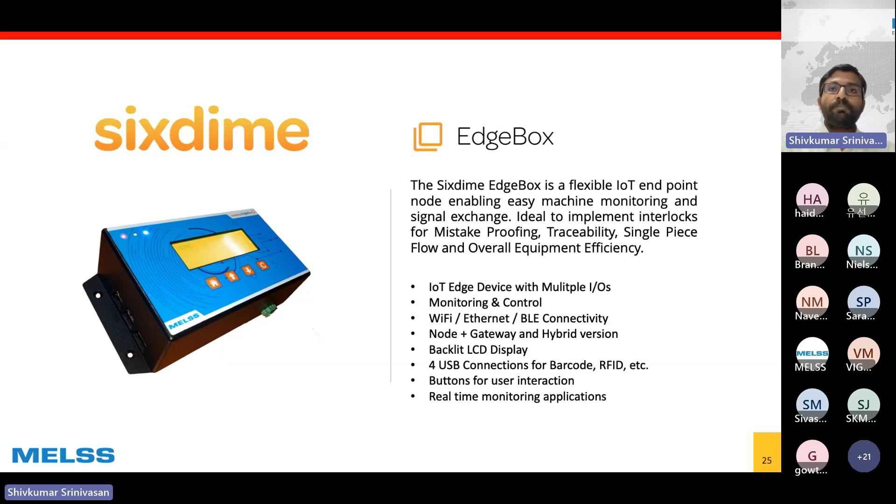One of our other partners with whom we deliver solutions from our Industry 4.0 portfolio is Visual Components. Visual Components is a very good add-on in terms of using OnRobot and Doosan, because the entire line can be designed, and you could simulate it and evaluate how it's going to be.

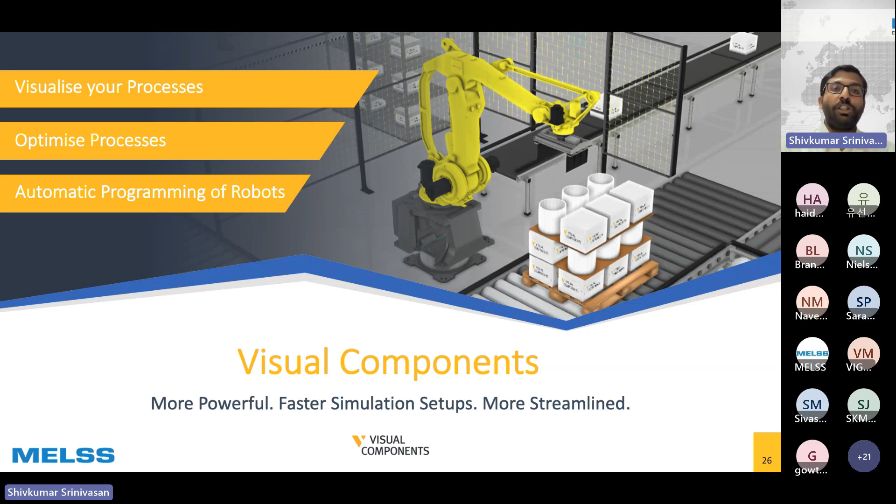Visual Components is a building block. It has a platform where more than 2,800 standard components are available, and you are able to drag and drop them to create and visualize your line as a digital twin. In fact, all Doosan Cobot products as well as OnRobot's end-of-arm tools are available as part of the library in Visual Components. This makes it extremely easy for anybody who wants to visualize their line and see how a particular process can be set up.

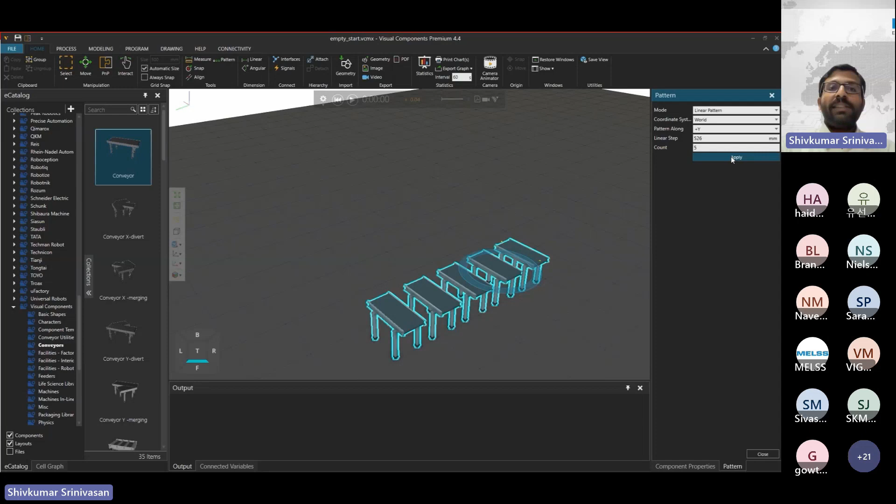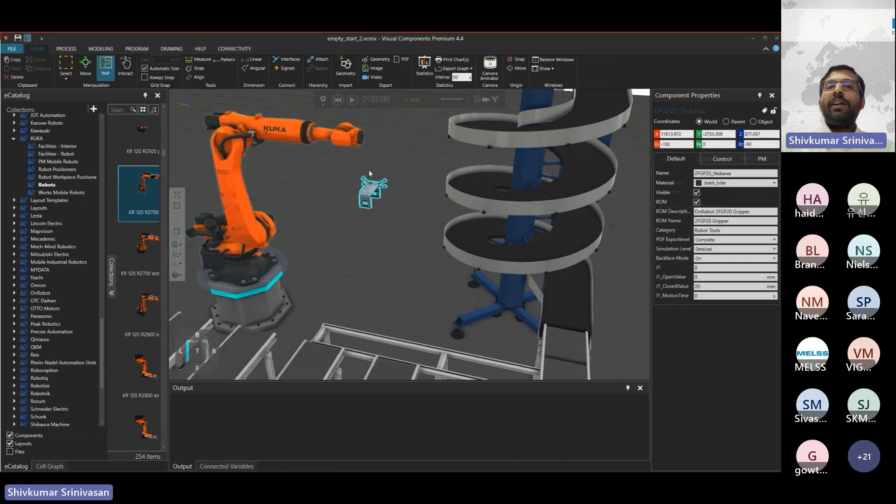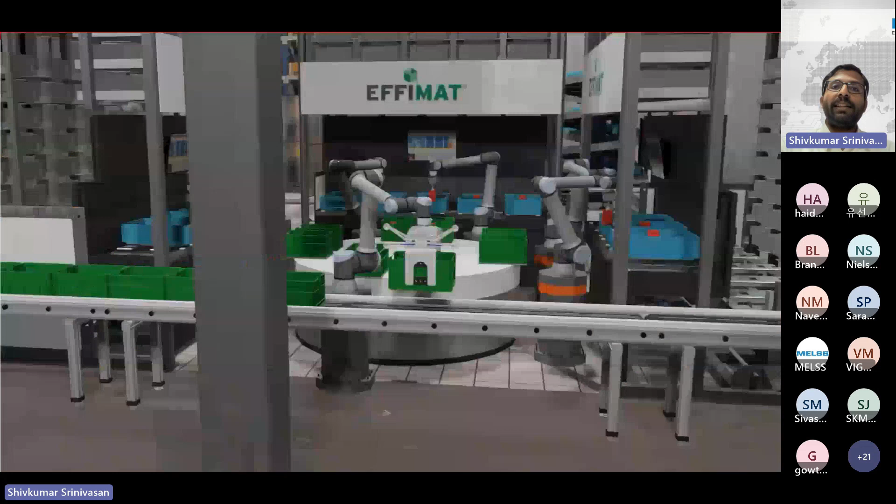So as you can see, it's just drag and drop, and a huge library of products are available for you to drag and drop. All the robots, kinematics, designs, their payload and reach are all pre-configured, and standard grippers from different models are available. So you can set up your routes, how your products are going to move, how your robots are going to interface, and you'll also be able to simulate and calculate cycle times and other activities as part of imagining the entire shop floor.

It's not only for setting up new shop floors or factory lines, even your existing lines you could configure and visualize as a digital twin, and determine how to optimize to reduce the number of routes you may have, the number of times people have to walk, or improve the ergonomics as well.

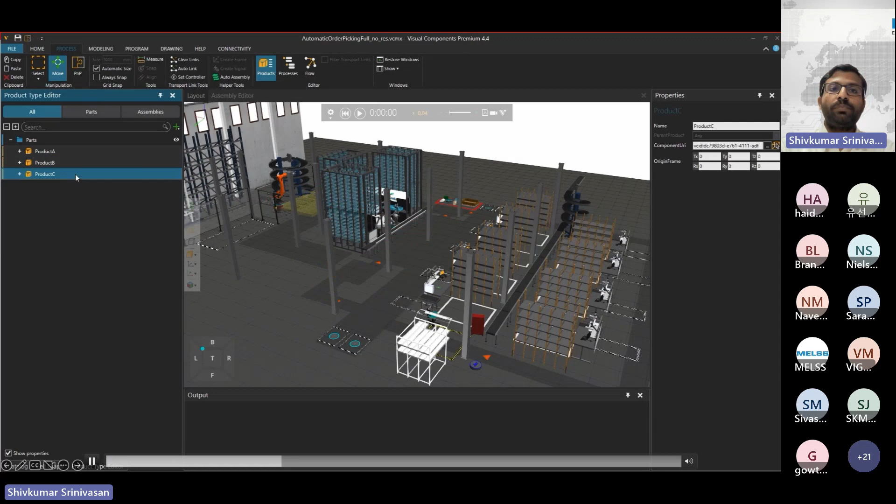So with that, I'd like to end my presentation and summarize that with Doosan and with OnRobot, palletizing solutions are pretty easy for us to position, and we are able to easily configure them as well. And with given MELSS capability, we have all the demo units here, and we are able to easily integrate the entire line for you, be it whatever type of functionality or complexity that you may have.

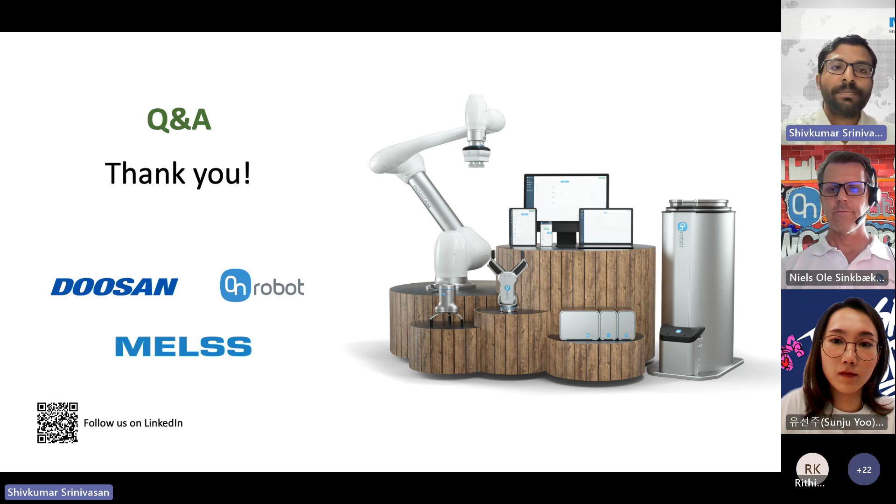Thank you all. Pleasure. Thank you, everyone. Thank you, thank you, thank you, team.